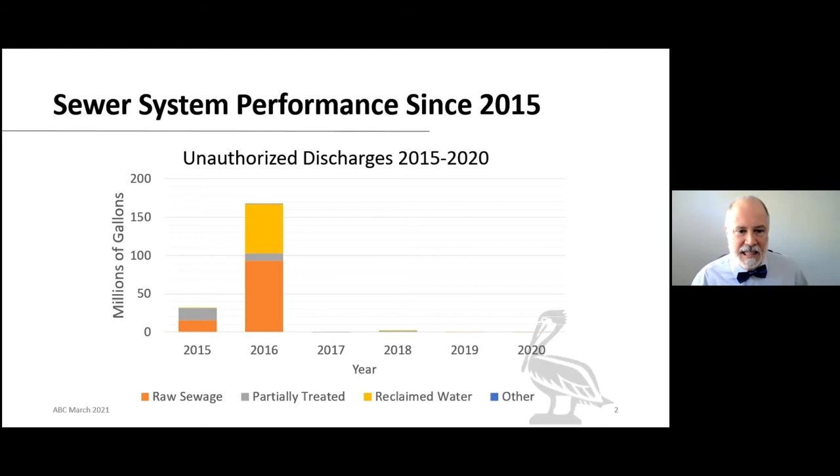But there's a lot of underlying chronic issues with our very large, very old system that we will be working on continuously for the future. But we have a 20-year plan of what we're going to be doing to make sure that the chronic situations don't get to an acute state like they did in 2015 and 2016. So we're under a consent order right now from the state for those spills.

We also have been working on our Kriseman Infrastructure Plan. This is to address those acute issues right up front. As you can see from this timeline, there's going to be some overlap between the consent order and the infrastructure plan and the master plan that we have created.

We call this our Integrated Water Resources Master Plan. This is our 20-year planning document to move us forward, to make sure that we're properly investing in our water system, reclaimed water, and stormwater systems. That's why we call it the integrated water system, because it's not just looking at one water source. It's looking at all the water sources and how they interact with each other.

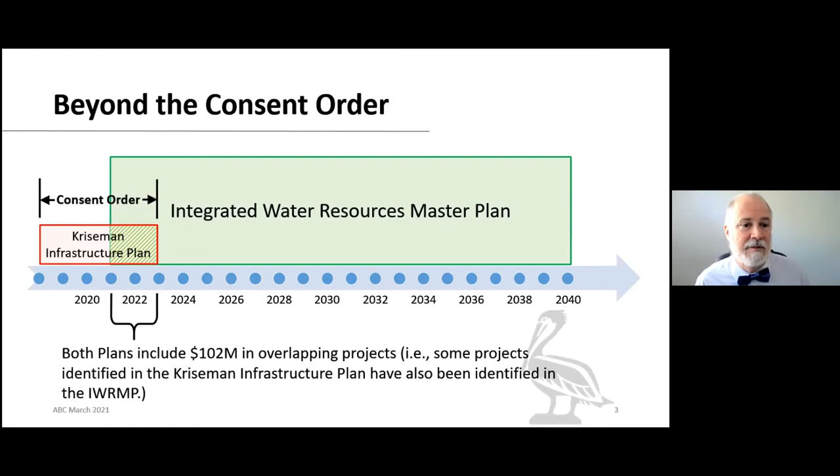As you can see from this, I tried to show how the Integrated Water Resources Master Plan is not only longer than the Kriseman Infrastructure Plan, but also much, much bigger. So I have here some numbers showing you why I mentioned that it's much bigger.

20-year capital improvements over the last 20 years and going forward: from the 20-year period of 1996 to 2015, the city invested a total of about $800 million into our water, wastewater, and stormwater systems. Now these dollars are in 2019 dollars, so I adjusted the actual dollars spent in that 20-year period with the appropriate inflation factor to get it to a 2019 equivalent. So during that period, we invested a little over $800 million worth of projects.

However, as our master plan has shown us, we really should be investing close to $2 billion every 20 years. And in order for us to reach a point where we feel that we have incorporated the appropriate sustainable and resilient investments to deal with climate change, for the next 20-year period, we actually believe we should be spending close to $3 billion over the next 20 years.

On an annual basis, in the past we were spending about, on average, $40 million a year. Right now, just to maintain the appropriate level of investment, we should be at about 105 million. But moving to the sustainability investment, we really should be close to $160 million per year in investment. And the reason why this is important to show you is that these numbers are big.

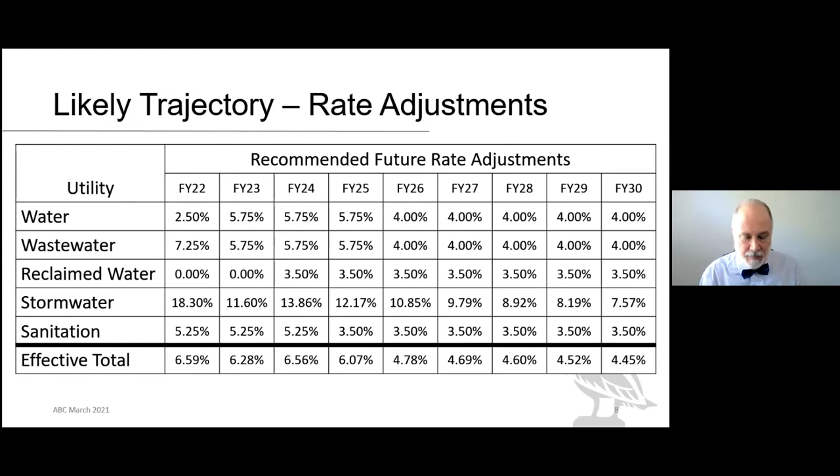So what does that mean for a typical utility bill? Regrettably, it means more money. In fiscal year 21, a typical utility bill - everybody's is a little different - but if you take an average bill, if you have reclaimed water right now, your bill is roughly $156 a month. If you do not have reclaimed water, it's roughly $125 a month.

We are projecting that in the next 10 years, that needs to jump up by anywhere from 53 to 60%. That is huge, but it is based off what we know needs to be done to the system, what we've heard from the public about their expectations for the system, and new regulatory requirements that are coming down the line. We took all of that into account to come up with our 10 and 20-year plan. So regrettably, we do not see water and sewer rates leveling off anytime soon.

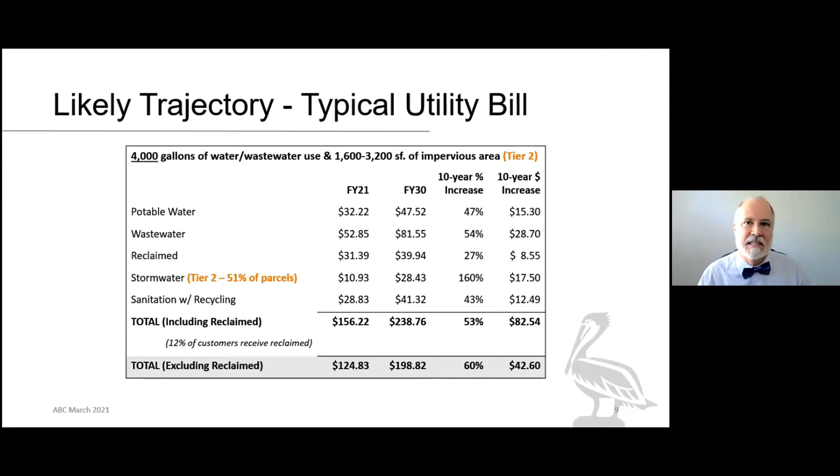One of the questions we get frequently is, well, if you're going to raise my rate by 5%, what 5% additional services am I going to see? Regrettably, since we've been underinvested, we're playing catch up. So that 5% increase you might see is not necessarily going to be a 5% increase or improvement in service, because we're playing catch up. We can't have the luxury of extra things because we're still trying to get to the point where we have the things we need.

A question that came up also is on the private lateral pilot study. We've talked in the past about how private laterals do not belong to the city - they belong to the property owners - but they contribute to leaking of the system, allowing stormwater and groundwater to enter during heavy storms and cause sewer overflows. So we've been working on a pilot project to determine how effective it is to fix those private laterals and what kind of feedback and reception we get from the public in that program.

We had 2 communities that we chose that were representative of areas where we believed, based on the age of the community in terms of when the houses were built, how close the community is to groundwater or surface water, that we could evaluate the impact of repairing those 50, 60, 70-year-old private laterals.

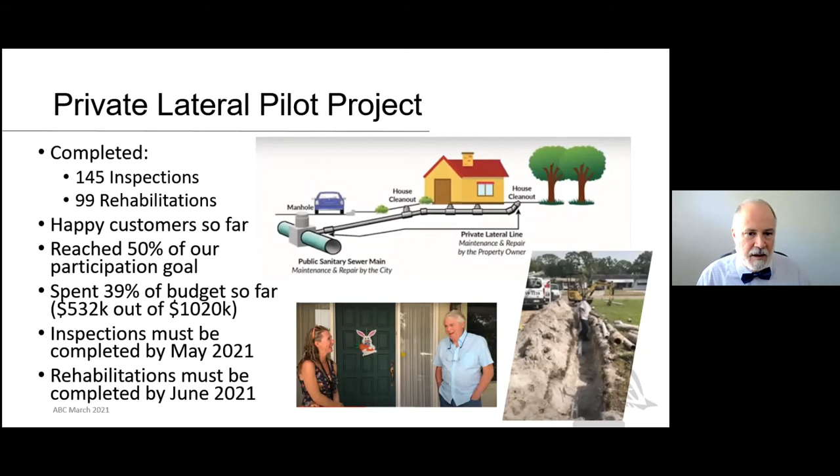Regrettably, we've only reached 50% of our participation goal, and we've been a little frustrated that there hasn't been as much feedback or willingness by the community, by some members of the community.

This is helping us understand how difficult it is to get the word out to the community. We've been going out to the 2 neighborhoods and putting out door hangers on a monthly basis, sending out notification letters, putting things on Facebook and Nextdoor. We've been calling those homeowners for whom we have contact information, though we don't have contact information for every property owner. We've been participating in virtual meetings like this one, and we've had staff walking the neighborhoods to talk to people and try to get them to participate.

We don't really know why those who've chosen not to participate choose that. We don't really know, because we don't want to be rude and ask why not, why aren't you participating?

What I've found is that we have those 2 different neighborhoods, and Greater Pinellas Point has a slightly less participation rate than Maximo Moorings. What we've learned through our deep dive into the data is that a lot of those homes in Greater Pinellas Point are rental properties. They're single family homes, but the owner doesn't live there, the owner is renting it out. Sometimes the owners don't even live in the city, they live elsewhere.

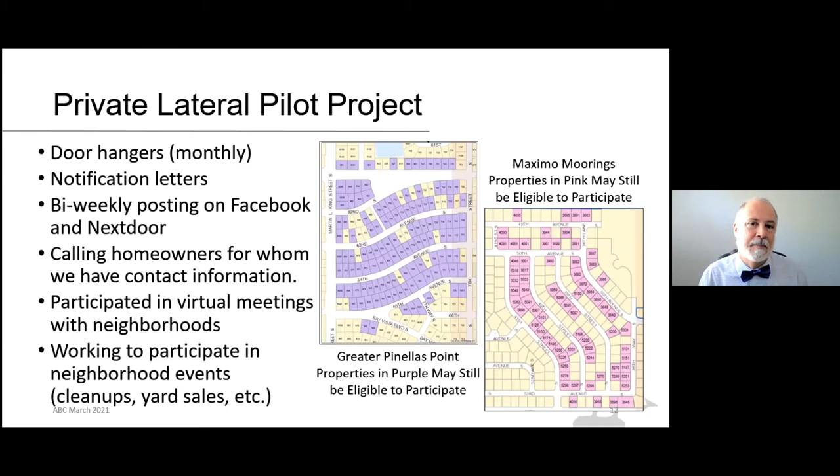Biosolids to energy. This is a project that's near and dear to you because it's right next to you. This program converts the end result of the treatment process into energy. When we treat wastewater, in the simplest terms, we separate it into reclaimed water, because it's been treated, had all solids removed, and been disinfected, and the solids that we remove, we call those biosolids.

But those biosolids still have some value to them, and with additional treatment, we can extract methane gas from them. We've completed construction of that project and are now in a 12-month operational test, about 5 months into that. These are very complex systems, so these operational tests are needed to make sure every last component is working properly.

Right now, under the operational test, the methane gas, the renewable natural gas or RNG, is generating about 45% of the plant's needs. We're purchasing an additional 15% from TECO in purchased natural gas, which is fossil fuel, not renewable. And we're purchasing the remaining 40% of electricity from Duke Energy.

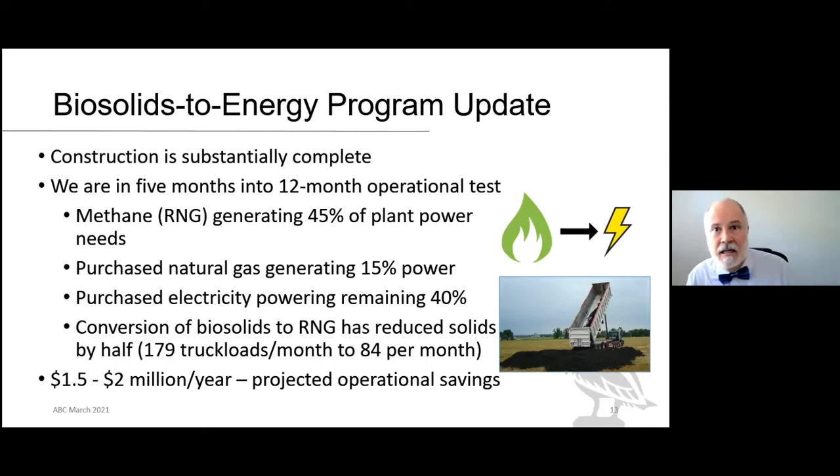So far, 5 months into this operational program, we're projecting operational savings of about $1.5 to $2 million per year, because we're generating our own renewable power and have fewer solids to dispose of, in addition to the benefit of not adding fossilized carbon into the atmosphere.

We are aware that living near a wastewater treatment plant puts you at risk of odors. Over time, the technologies to deal with odors have improved significantly. Regrettably, these plants are very complicated, they are biologically alive because we use microorganisms to help break down and treat the systems. They're so complex there's always going to be many different possibilities and potentials for odors.

One of the things you'll hear us use frequently is the word burp. This is a living system that is converting wastewater into a gas, sometimes carbon dioxide, hydrogen sulfide, or methane, but it's converting this waste into a gas. And just like all living creatures, when they need to get rid of gas, somehow it'll burp.

We try to capture that burp as best as we can, and we will continue to try to do so, but sometimes we're not going to be able to.

We can predict ahead of time when we're doing planned maintenance activities that there may be odors associated with them. Those maintenance activities are necessary, recurring, and required to ensure the system works. During these activities, we're at higher risk of a burp of that gas. That doesn't mean we're guaranteed to have one, but we're at higher risk.

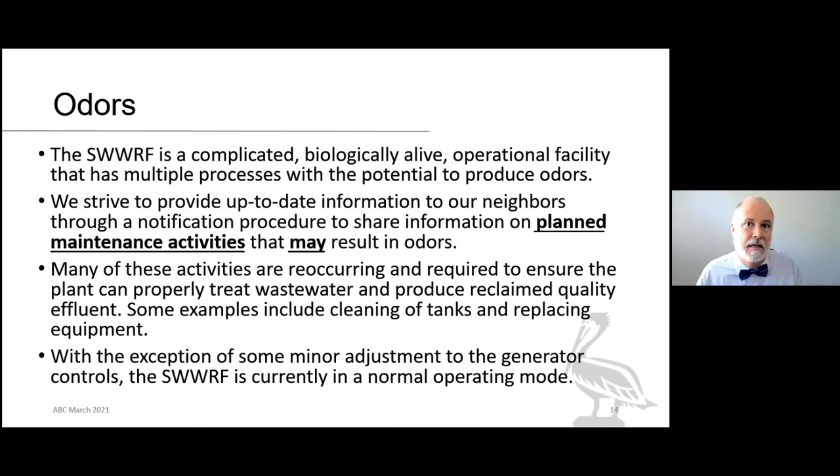Other times we'll tell people there may be an odor, watch out for it, and we'll get contacted later saying, hey, did you do the maintenance? Because you said you were going to do maintenance, we might smell odors, but we didn't smell any. Well, we did the maintenance, but we didn't have the release of gas. But we feel it's better to go ahead and notify you ahead of time just in case.

How do we control the odors? In multiple ways. We always control the odors, particularly where the raw sewage enters the plant, using physical methods to capture that gas, clean it, and remove the odors from it.

Where appropriate, we will actually cover and enclose our facilities so that gas is enclosed in a cover so it has less opportunity to escape. There are some facilities which we cannot enclose; they must be open in order to have the oxygen exchange necessary for them to work.

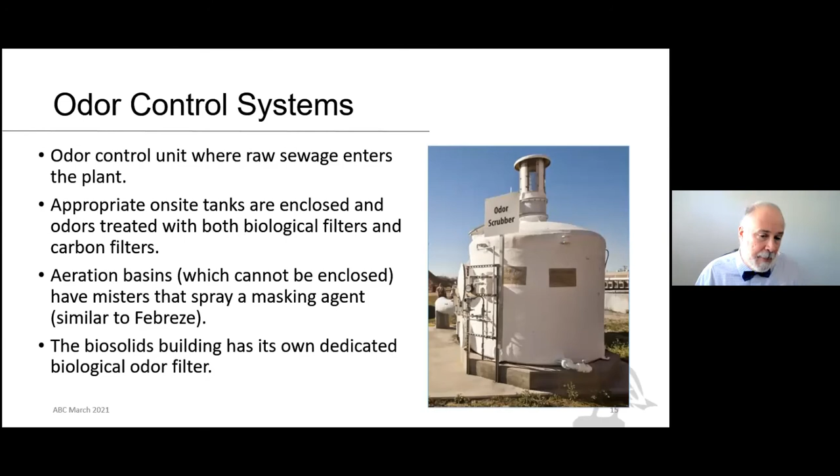So those facilities, such as the aeration basins, actually have misters that spray a masking agent similar to Febreze to mask the odors, dealing with them as they're in the air, and removing them chemically. And the biosolids building itself has its own dedicated biological odor filter.

We've also added an uninterruptible power supply to that methane system. The reason for that is whenever we might lose power, which we do sometimes with Duke Energy—they might have a glitch and we lose power—during that power loss, we may have a few seconds when we're transitioning from Duke power to our on-site generators.

During that few-second period, we can have a burp. So we've installed an uninterruptible power supply at these systems so that when the power is transitioning from Duke to our generators, we don't have that loss of power to that specific system, minimizing the opportunity of that burp.

We also have natural essential oil diffusers and vaporizers called a Hivon system. We have those on site, and we're actually looking to add more of them.

We're also looking to add redundancy to our primary seals, just in case a primary seal were to fail. That's a part of running a wastewater treatment plant—you have redundancy in everything you do. If a process calls for one pump, you must have at least two; sometimes you might have two with a third on standby. If a process calls for one generator, we have at least two. So we have these redundancies just in case something were to happen.

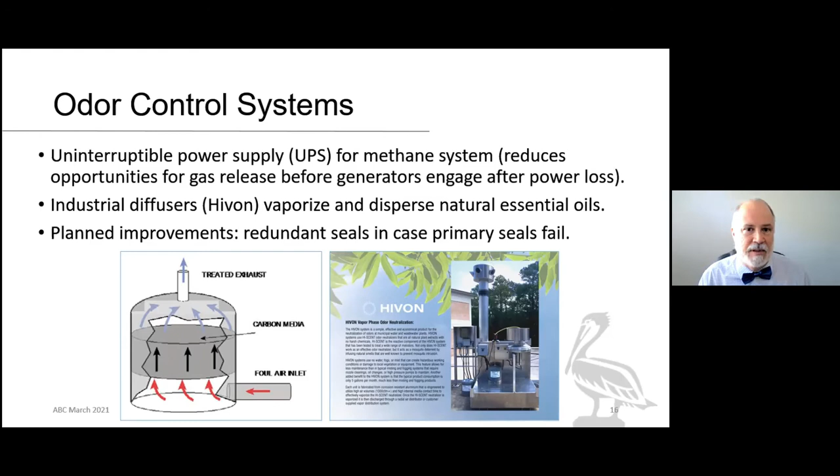A question that came to us was about storm protection. The Integrated Water Resources Master Plan has recommended that all our water resources facilities should be able to fully function with 3 to 5 feet of flooding above the 100-year base flood elevation. Now, many of our existing facilities already meet this, but not all of them—particularly the ones that are very, very critical already meet this requirement.

Some of the older facilities, such as office space on site, we may have a building at the Southwest plant. Our office space is probably built back in the 50s, and that is low. We know that we need to raise that building up. But it is not a building that, if it were flooded, would cause the plant to fail, which is why it's in our capital improvement program, but it hasn't been done yet. We're putting the money to meet critical needs first, then planning to follow up in the next 20 years on other areas.

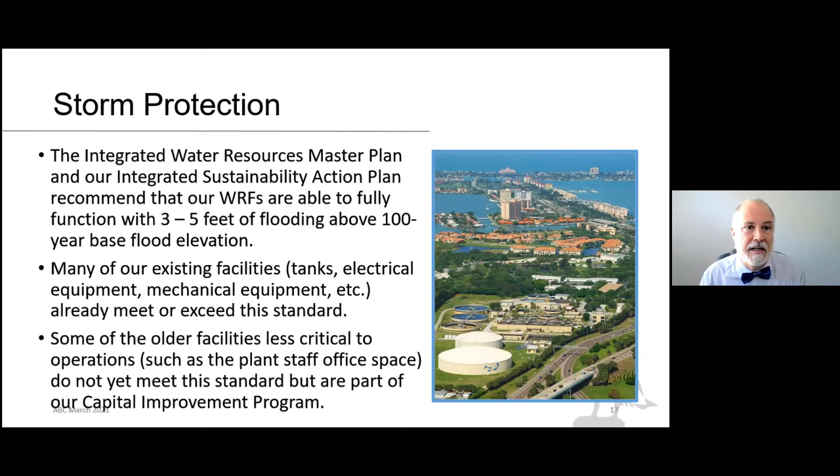We keep the water reclamation facilities running during a storm, a tropical storm, or a hurricane. We are required by law, by industry practice, and by good business practices. All of our facilities, including the Southwest facilities, are designed to what is called by the Environmental Protection Agency a Class 1 reliability. This is the highest reliability recommended and required by EPA for facilities like water treatment plants and wastewater treatment plants.

I spoke earlier about redundancy - this is where that redundancy comes in. That's what makes a plant reliable. You can't really have multiple plants and use one of them while the other two sit idle until you need them. You can't afford to do that, and it's not good for the equipment. So if we can't have multiple plants, we need to have multiple facilities, processes, and pieces of equipment within the plant. As you can see here, we have to have a minimum of 2 equal-sized tanks for each process, and the process must be designed to work with one of those tanks down.

And redundancy in terms of power and mechanical needs - we have to have backup power for the entire plant. We actually have backup power for the backup power for all the critical processes in the plant.

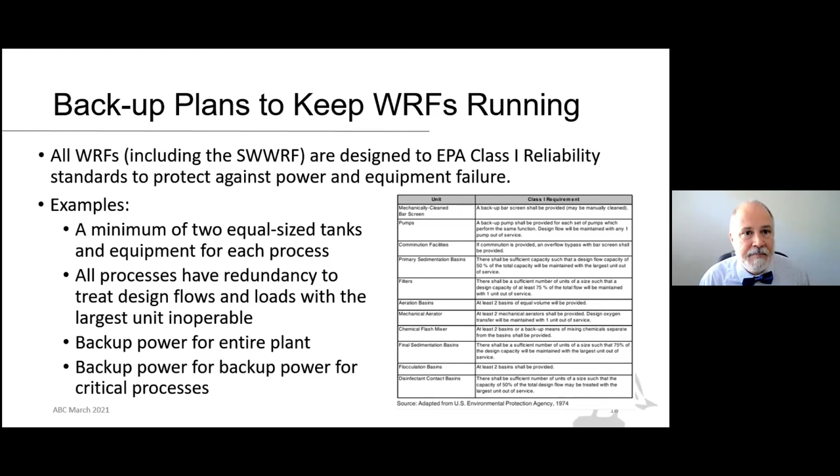But what is the risk of a sewage plant completely failing? It is possible, but very unlikely, that a sewage plant would completely fail. They are designed to be strong.

But as with most things, only as strong as their weakest process, which is why each process is designed with redundancy and reliability. It's impractical to duplicate plants because they're very big and very, very expensive, in the hundreds of millions of dollars. But it's very practical to design and duplicate backup processes within each plant. So while it's very, very unlikely to have an entire plant go down, it is more likely to have a single process go down, and that's why we have the redundancy.

But there are times when that single process goes down and the redundancy is not enough - that's when we would have an issue. So our 20-year program is to make sure that the redundant systems we have in place for our plants are appropriate to handle a bad case scenario.

I do also want to point out that it's not necessary for a community to have multiple treatment plants. We have 3 treatment plants, but there are many cities that only have 1 to treat the entire city. Some of them you'll be surprised: Boston, Detroit, Tampa, Washington D.C., all 1 plant, period. Everything in that entire community goes to that 1 plant. We have 3. Some of our closer neighbors like Tampa, Sarasota, and Bradenton also have 1 plant. Tampa has 1 plant. We have 3.

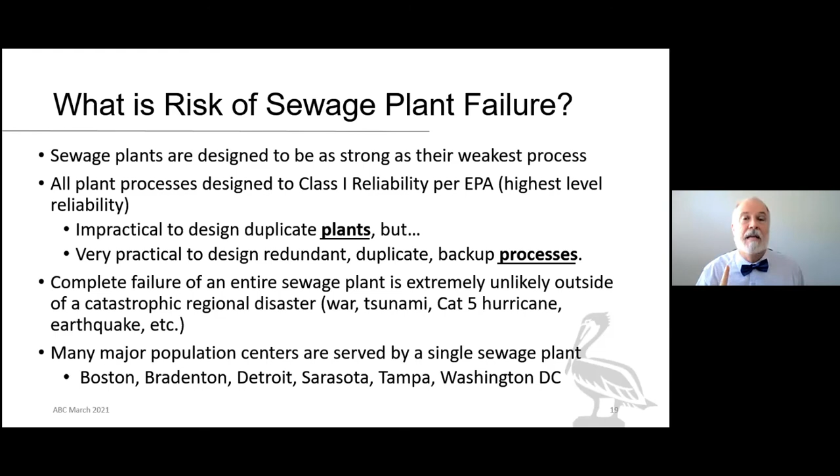So are those 3 plants connected? They are not directly connected to each other. In other words, once the wastewater reaches the Southwest plant, we cannot at that point direct it and pump it all the way to either the northwest or northeast. We do not have that capability, and that capability would actually be very expensive. We studied it - the Integrated Water Resources Master Plan looked at what it would take to directly connect all 3 plants to each other. We studied it, and it's very expensive.

So we stepped back and said, well, what can be done to affect the same solution without it being so expensive? What we're looking to do is connect each collection system - not the actual treatment plant, but the collection system that treatment plant serves. We're moving forward to make sure those collection systems have some connection. We already have 1 connection in place, which we call our flow control structure number 2. That allows us, in a unidirectional manner, to transfer flows from the northeast basin to the southwest basin. When the northeast basin might be getting heavier rainfall than southwest, we can balance the flows by transitioning those flows from northeast to southwest.

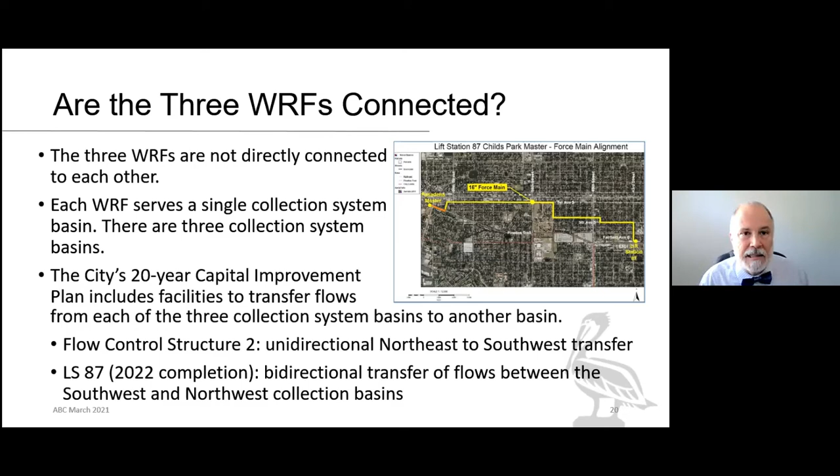We've selected what we call a worst-case planning scenario. We can't design a system to withstand any and all possible negative things that could happen to us. It's not cheap, and there's no way we could pay for it. So we had to decide what our level of service would be, designing our system so we'd have great confidence handling a storm up to a certain level.

In 2018, City Council chose a 7-inch 24-hour rainstorm as that standard, which actually is the same kind of rainstorm we got during Tropical Storm Hermine. We had evaluated a 2-inch, 3-inch, 4-inch, 5-inch, and 7-inch storm, and City Council selected the 7-inch.

So this reliability, worst-case planning scenario means our system should be able to successfully handle any storm that is less than a 7-inch 24-hour rain.

Anything greater than a 7-inch 24-hour rainstorm, we may still be able to manage, because these are not static systems. They're operated by very talented people, and when you add the human factor, those talented people can make a static system perform on a short-term basis better than it was designed to do. But for pure design purposes, our 20-year program has looked at a system that would handle a 7-inch 24-hour storm, again equivalent to what we saw during Tropical Storm Hermine.

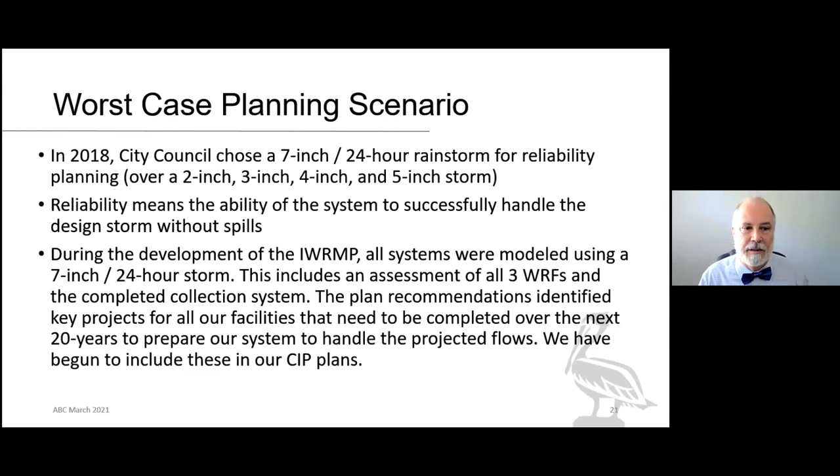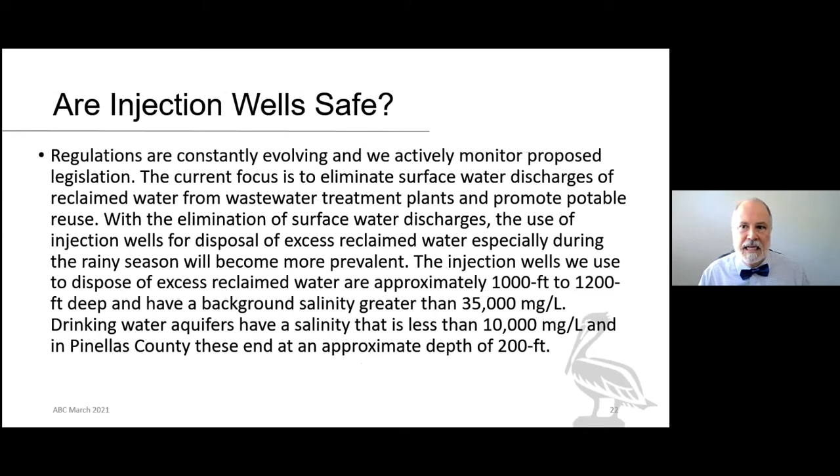The final issue I wanted to talk about was injection wells. We've often had questions about whether injection wells are safe, and we do use injection wells. I want to be very, very clear here.

We use injection wells to dispose of excess reclaimed water when our supply exceeds daily customer demands. It is absolutely 100% physically impossible, by the laws of nature and physics, for untreated sewage to enter the injection well. The injection wells are not connected to our system in such a way that untreated sewage could get to the injection well and be placed into the aquifer. What is disposed into the aquifer is reclaimed, quality water.

We have enough storage in tanks to store one day's worth of reclaimed water, but no ability to store multiple days, weeks, or months of it. There are many times a year where our supply exceeds what our customers demand, so we have to get rid of that reclaimed water somehow.

The state and EPA allow two options: discharge it directly to a water body like the bay, a canal, a creek, or a lake, or inject it into an aquifer below us that isn't used for drinking water. That's what we've chosen to do of those two options.

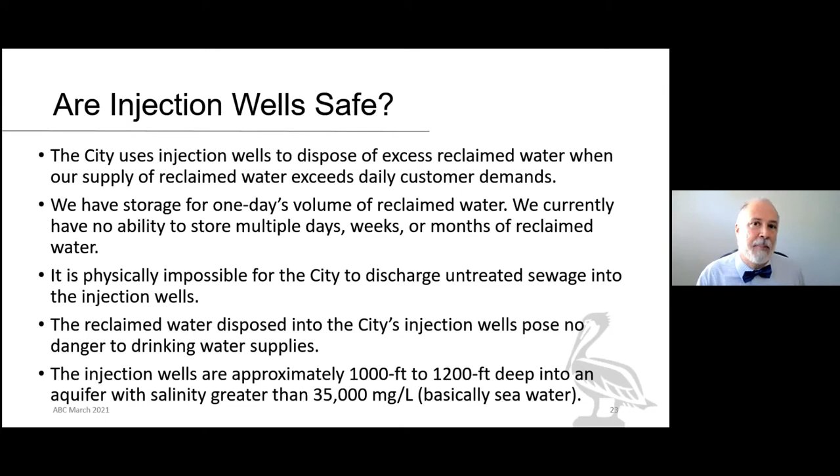The reclaimed water we inject poses no danger to the city's drinking water. First, the aquifer we inject into is as salty as the bay and the Gulf. Therefore, we couldn't pull that water out for drinking unless we desalinated it. But if we're going to go through the process of desalination, it's so much cheaper and more reliable to pull salty water out of the bay than to try to pull it up out of a well that can fail.

Another thing that protects our groundwater and drinking water is that the aquifer we inject into flows from northeast to southwest, traveling towards the Gulf, away from our sources of drinking water. Our drinking water actually comes from up here in Hillsborough County.

Our drinking water does not come from beneath the city. It does not. Our drinking water comes from up in here, and then it is piped to the city.

Where we inject this reclaimed water is beneath the city, and beneath the city is in a southwest direction. We have monitoring wells, so if we have an injection well here, we've surrounded it with these monitoring wells so we can monitor what we've been injecting over the last 40 years.

And we've discovered that what we've been injecting creates this bubble, because the water we're injecting is fresh versus the brackish water we're injecting into. Fresh water is less dense than brackish water, so it tends to rise to the surface, and it'll create this bubble.

There's a barrier here that prevents that water from breaking through that very, very shallow freshwater aquifer that people use to irrigate their lawns. We've measured that over the last 40 years of using these wells, this bubble has only grown to about 3 to 4 miles wide, which is reflected right here.

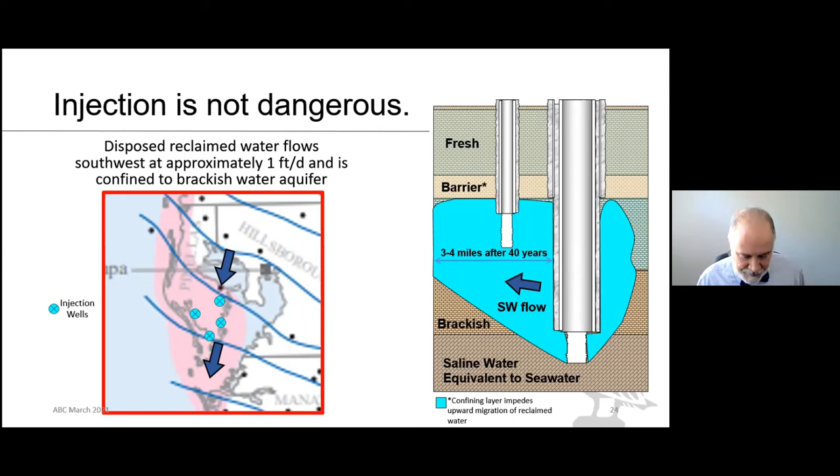To go through those questions, Bill, thank you so much for sending those questions to me. I hope I haven't bored you guys too much, but I'd be happy to answer any questions you may have on these issues or anything else.

Well, Claude, I'd like to right off the bat thank you for an excellent presentation. You took those questions head on and provided us with some very specific information that I think is important for people to realize. I guess the one general question I'd have, especially when you talked about the private laterals—that's an issue. But another issue is, how do we make sure for the next 20 years we have people in your position and in the city who are willing to continue spending the kind of money you're talking about in order to solve the problem? It's happened before that people decided not to spend the money. How do we make sure this continues?

There's no way to guarantee it'll continue, because we have no mechanisms in government to require future councils to spend money. As you know, we go through an annual budget process, and we have no mechanisms that allow us to require councils 10 years from now, 20 years from now, to spend the money that we think needs to be spent. So there's no way to guarantee it.